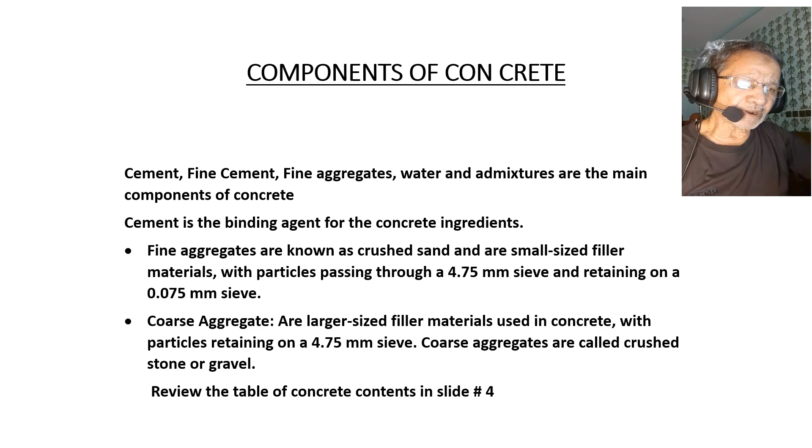Angular aggregates improve interlocking in concrete, while round aggregates may ease the workability but reduce the concrete strength and durability. So we have to consider all these things; choosing the aggregates rightly is essential to producing durable and high performance concrete.

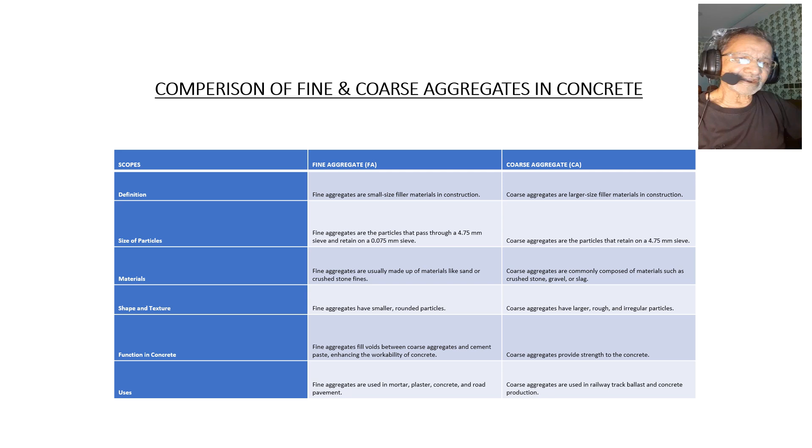Thank you. In slide number 4, we will review the table of scope of works, definitions, sizes of particles, materials, shapes, textures, function in concrete, and finally the use of fine and coarse aggregate in concrete. This table is very important, so please review it.

Thank you. In slide number 5, we will discuss concrete vibration, meaning that we have to compact the concrete.

Dear engineers, in every slide you can notice that the slide text is different from my video recording, because I can speak on the same topic in different ways. I am writing twice, once in the slides, and then while speaking I write on another computer and speak to you about those topics in another way.

So revibration: a properly executed revibration results in improved concrete quality, increased strength and bonding of the concrete, diminishes the chances of shrinkage resulting in hair cracks, reduces voids, and better concrete can be obtained.

Importance of vibration of concrete. Vibrating concrete is critical because by removing air pockets and consolidating the aggregate particles together, it increases the compressive strength of concrete. Tightly packed particles result in stronger, more durable concrete, and concrete which has not been vibrated is full of small air pockets, which results in honeycombing.

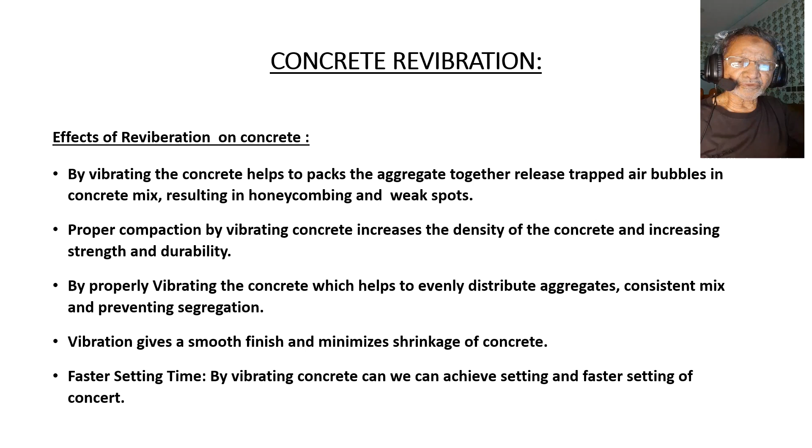Thank you. In number 6, we will discuss the benefits of revibration of concrete. There are some repetitions in my video, because I want to repeat every time so that you can understand the topic very well.

Eliminating air pockets is one of the qualities of revibrating. Removing voids that may form during the initial pouring ensures better compaction and density. Revibration decreases the porosity and the concrete gets better shape. Revibration gives a smoother surface, reducing the need for extensive rework and improving the finishing of the concrete.

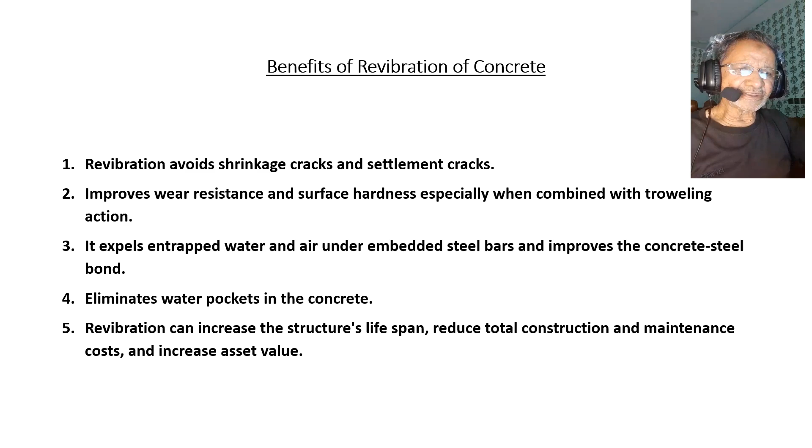Revibration minimizes air pockets and can help reduce cracking during curing. Overall, the improved density and strength lead to a more durable concrete structure that can withstand the worst environmental conditions. So all these qualities are there in revibration of concrete.

Slide number 7, we are going to discuss the consequences of not vibrating concrete. Unvibrated concrete can have significant air pockets, leading to weak spots, and potential structural failure may happen, reducing the overall compressive strength and tensile strength of the concrete, which may compromise the quality and affect the integrity of the structure.

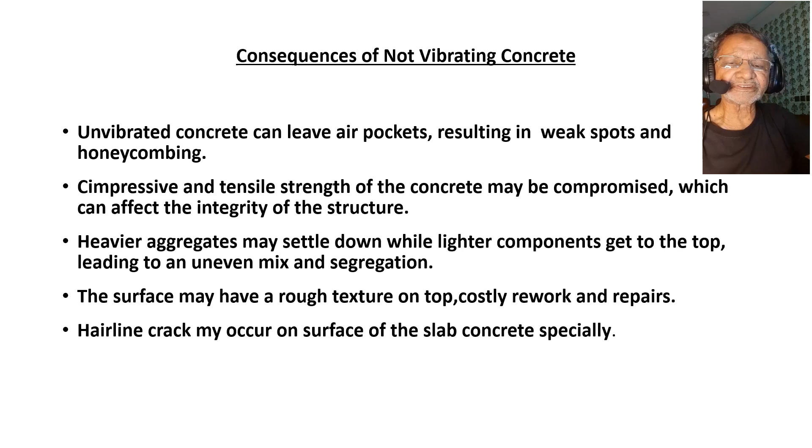Segregation may happen without vibrating the concrete. The components of the concrete can segregate, which can give honeycombing or a bad shape to the concrete. Poor surface: when we are not vibrating, we will get a rough and uneven surface, and the components of the concrete are not mixed properly. So all these effects and consequences affect the concrete if we are not vibrating it.

Now we'll discuss the process of manufacturing concrete. This is slide number 8. There are different procedures of manufacturing concrete. We will discuss a few of them. Number one is material batching, or measurement by volume or by weight. Number two is mixing the concrete. Number three, how to transport the concrete. Number four is pouring in formworks, which means in shutterings.

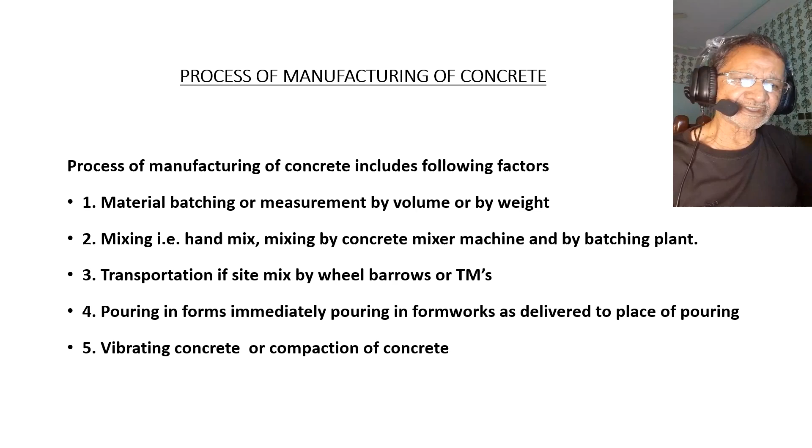And finally, we have earlier also discussed compaction, meaning the vibration of the concrete. These small points we will discuss in a bit of detail. Engineers, very quickly we will discuss the points we highlighted in slide number 8. Material batching: batching concrete in batching plants. In this process, the components of the concrete are measured either by volume or by weight. Mixing by mechanical mixer machines is done by volumetric measurements, and one bag of cement is equal to one box.

Concrete can be mixed by hand, by mechanical mixer or by batching plant, but we have to take care that all the methods are done in a homogeneous way, so the consistency of the concrete remains. The concrete should be transported to the working place as soon as possible, before the setting time of the cement. Pouring the concrete in formwork: the concrete, when it is ready to pour, must be transported and poured in formworks as early and as safely as possible. So all these precautions are to be taken for pouring of the concrete.

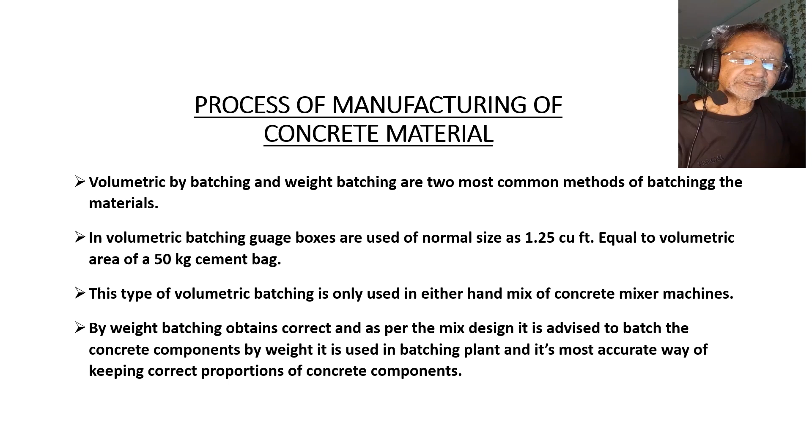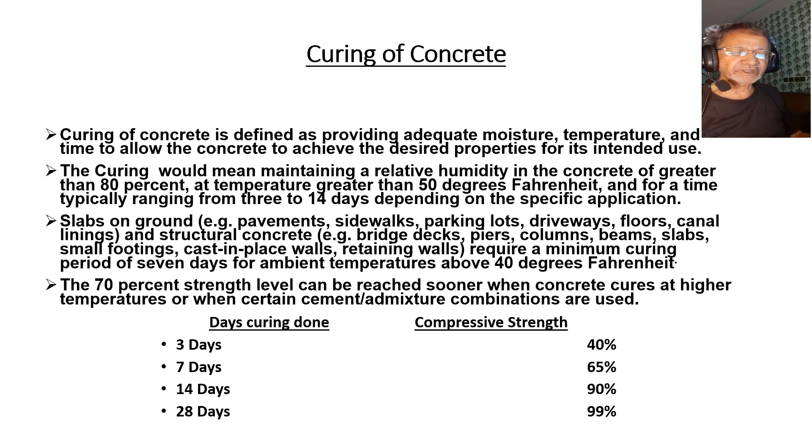Slide number 10. We are going to discuss curing. Concrete curing is the process of maintaining adequate moisture in concrete within a proper temperature range in order to support cement hydration at early ages. Hydration is the chemical reaction between the cement and water when these are added together. The resulting formation of various chemicals contributes to the setting and hardening of the concrete. So curing is the most crucial item, and we have to do the curing as per the nature of the concrete.

Even if the concrete is cured, excess water still must evaporate from the concrete. While it only takes 28 days to cure the concrete, drying can take months and months. So we conclude this topic, and we will go through the topic again in part 3.